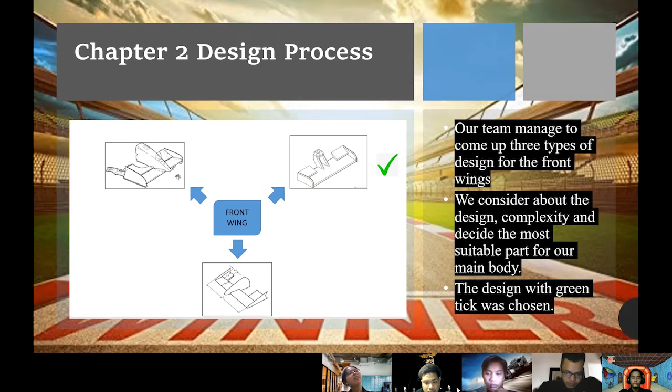We considered the design complexity and decided the most suitable part for our main body. The design with the green tick was chosen for the front wings.

For the rear wing part, our team also came up with three types of design. We considered the design aerodynamics for our main body to choose the best one, and the design with green ticks was also chosen for this project.

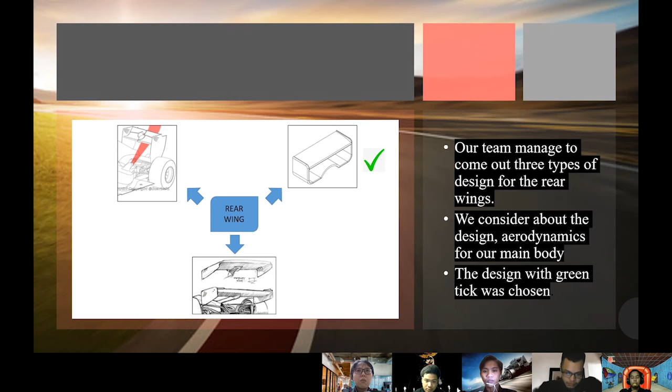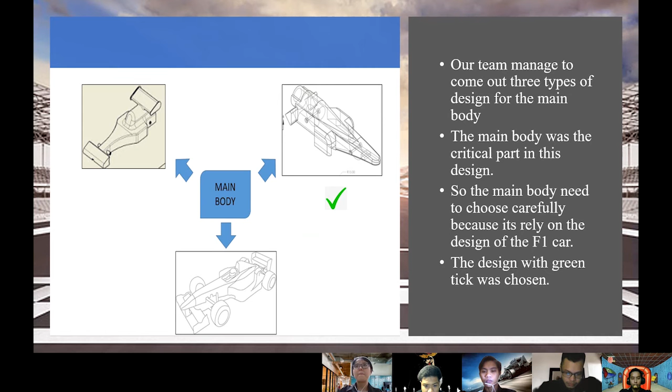For the main body, which is the critical part of the design, our team also managed to come up with three types of design. The main body was critical because it relies on the perfection of the F1 car's design and performance, so it needed to be chosen carefully. The design with green ticks was chosen also.

Next part is the wheels. We came up with three types of wheels, and the design of the wheels is important for the cosmetic effect. The design with green ticks was chosen.

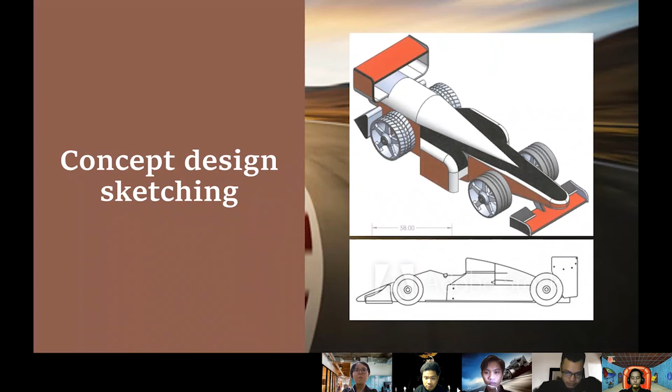This is the concept design sketching for our group. There are two types of concepts that we considered, but we chose the top one.

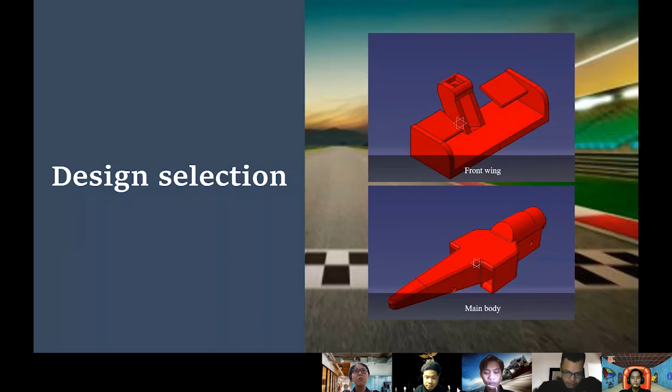This is our design selection after we completed the sketching and graphics. There are two types here, which are the front wing and main body.

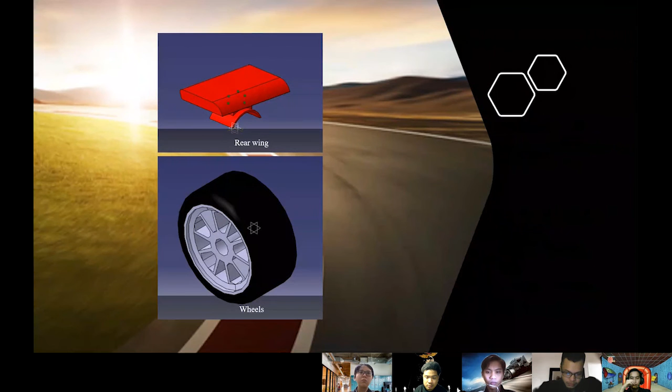Next is the rear wing and wheels also, which was done by the teammate. And this is also part of our F1 car: the shaft, the race power pack, and bearing.

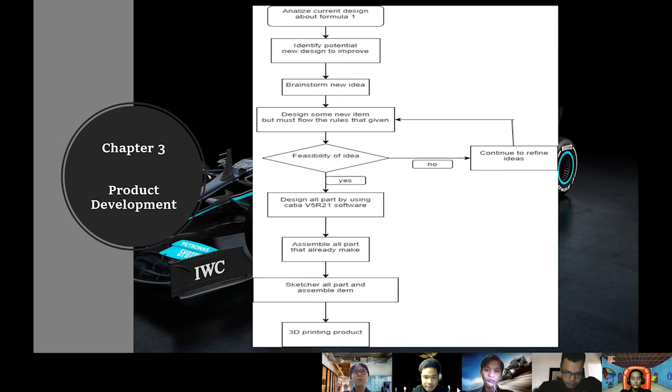The first thing is we analyze the current design of the F1. Next is to identify the potential new design to improve. Then brainstorm new ideas, designing new items that must follow the given rules. After that is the feasibility of the idea, but if the decision is no, we continue to refine the idea. If yes, we continue to design all the parts using Catia V5R21 software, and then assemble all parts that are already made. Then we sketch all parts and the assembled item, and lastly is the 3D printing of the product.

Okay next. So this is the assembling view. The weight of the F1 car is 156.29 grams. It's assembled by myself, Muhammad Akmal Hakimi bin Norazmi.

In this criteria, the length from the wing to the front wing is 201.32 millimeters. Then the height of this F1 is 63.15 millimeters.

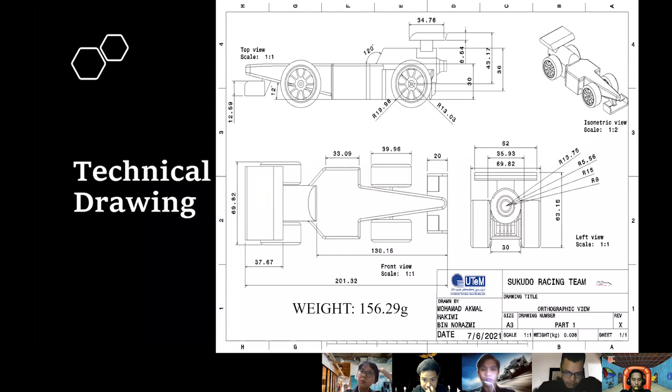So this is the drawing for the list of parts. Total list parts in this drawing assembly is 8 parts. The first is main body, the second is power pack, the third is drive shaft bearing, the fourth is the drive shaft, the fifth is tire, sixth is adapter rear wing, the seventh is back wing, and the eighth is...

Front wing one. Next.

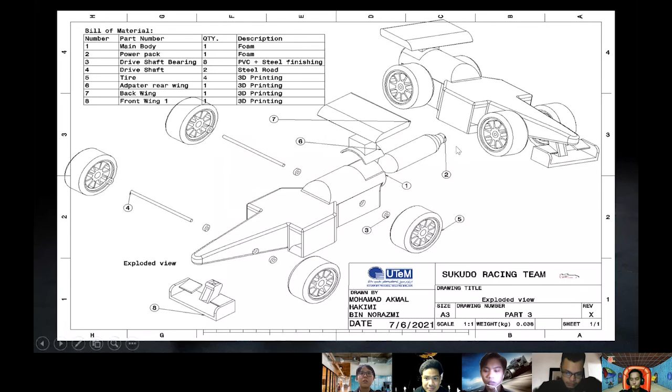So this is the cockpit side. The green mark is the cockpit side for the item. Okay, next.

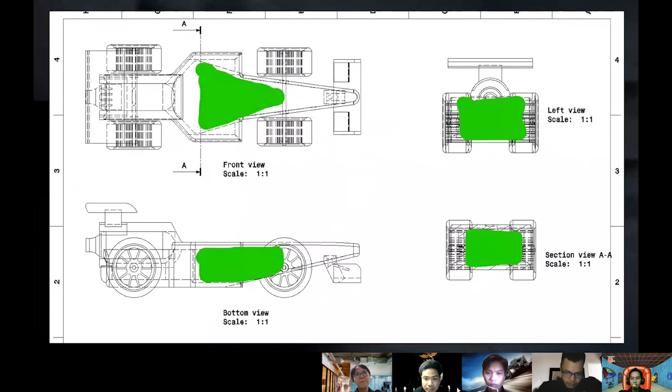So the first part is the main body. The main body, we learned from the aerodynamics. So there, if you see, it has the airflow, and it is designed by me, Muhammad Akmal Hakimi bin Norazmi.

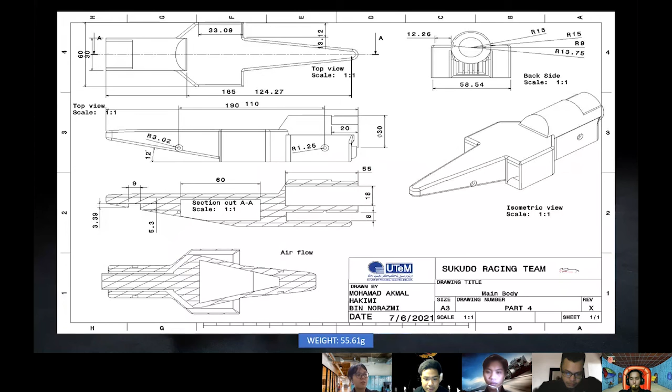So this is the power pack. The dimension in the power pack, we just copy from the rules of the F1 formula. So the weight for the power pack is 6.97 grams.

So this is the bearing, the bearing for the drive shaft. So the diameter is 6, so the weight is 0.065. For our car, we use 8 pieces for this part.

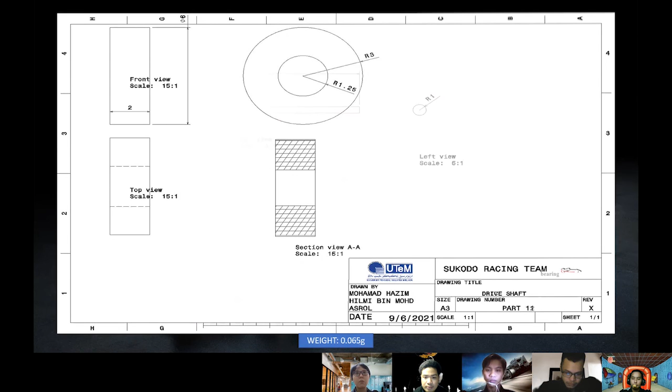Okay, this is the drive shaft. So the length for the drive shaft is 64. It's drawn by Muhammad Hazim Hilmi bin Mohd Asrol. So the weight is 1.58 grams.

So this is the design for the front and back tire. It's designed by Muhammad Afif bin Yusri, and the weight of the tire is 18.12. So the tire we use is 4 pieces for this project.

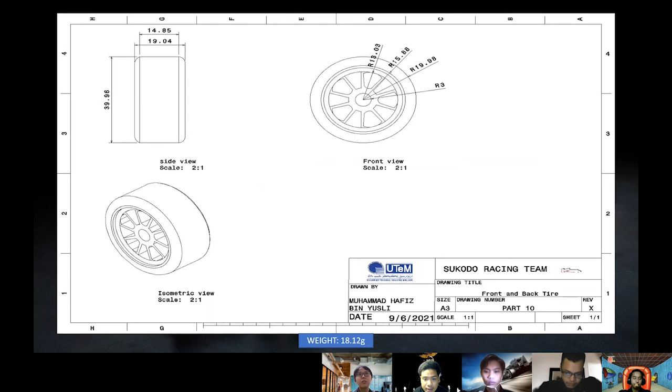So this is the front wing. We designed it to match the aerodynamics. It's designed by Shafiq bin Samsudin, and the weight is 5.7 grams. Next.

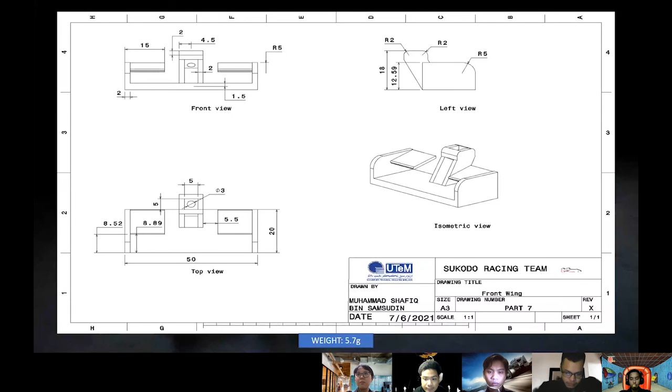So this is the background of our F1 car. So that is all for me. Thank you.

Assalamualaikum, my name is Muhammad Hazim Hilmi Muhammad Masrul. On this slide, I'm going to present about the component analysis. As you can see on this slide, these are two critical parts that we choose, which is the shaft drive and also the shaft bearing.

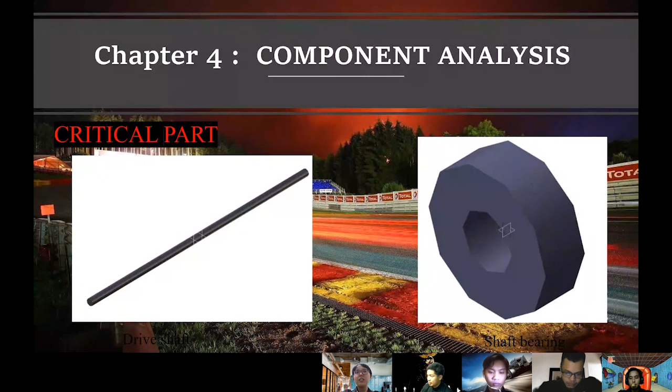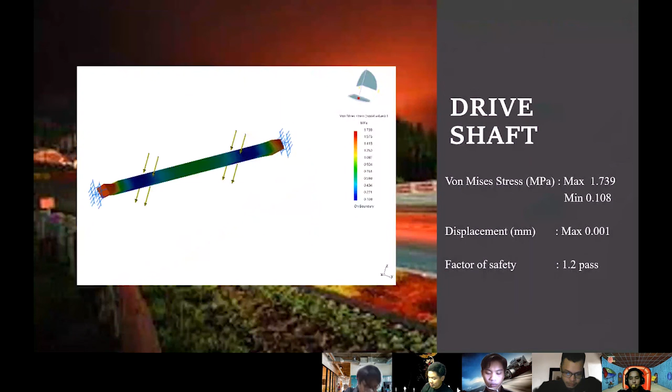On this slide, this is an analysis result of the shaft drive. The maximum value of von Mises stress is 1.739 megapascal and the minimum value is 0.108 megapascal. The displacement is 0.001 millimeter and the factor of safety is 1.2, which passes the requirement.

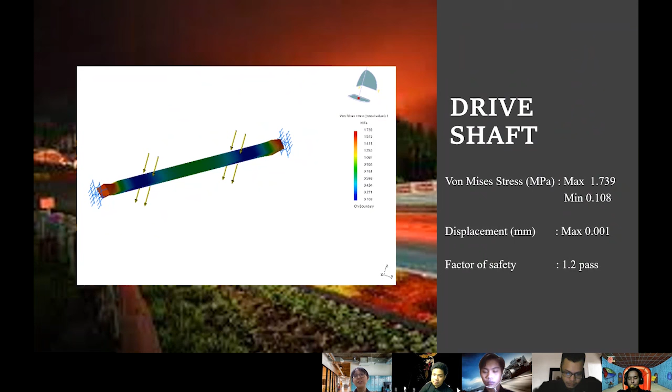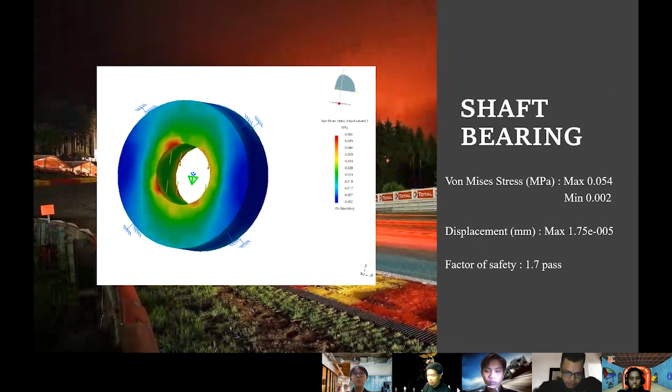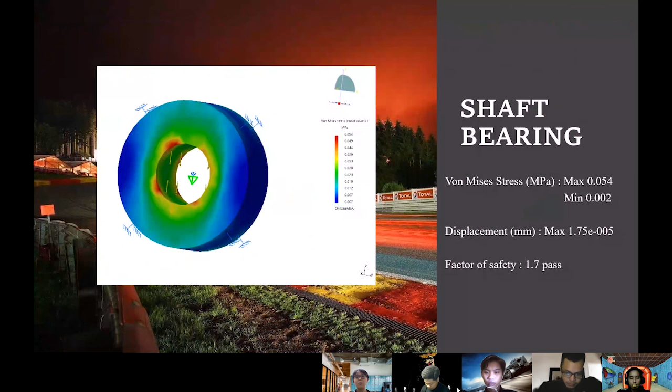On this slide, this is a shaft bearing analysis. The von Mises stress maximum is 0.054 megapascal and the minimum value is 0.002 megapascal. The displacement is 1.75 times 10^-5 millimeter and the factor of safety is 1.7, also passing the requirement.

Okay, now I will continue the bill of material and cost calculation. Firstly, I would like to introduce myself. My name is Muhammad Shafiq bin Samsudin and my matric number is

B0919110188. Okay, for this project, we use three types of material. The first is steel plate, with dimensions 1.5 millimeters times 3.0 millimeters. The second material is steel rod, with dimensions length 150 millimeters and diameter 8 millimeters. The last material we use to complete the project is nylon wheel.

Okay, for the cost calculation of all the materials, the first, steel plate, we use six pieces. One piece is RM 10 and the total of six pieces is RM 60.

And the second material is steel rod. Steel rod, two pieces, and one piece is RM 25 ringgit and 38 sen. The total of the steel rod is RM 50 ringgit and 76 sen.

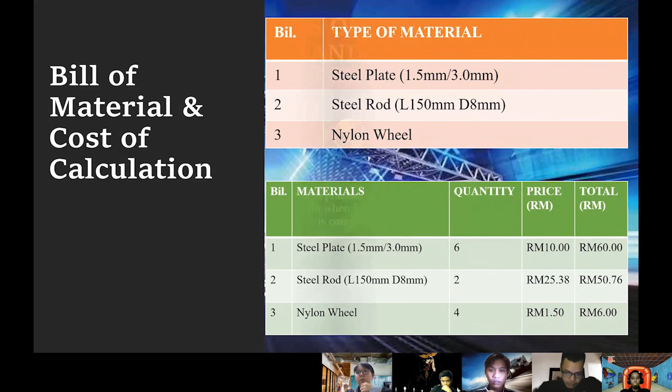Okay, next is the process in terms of safety, environmental, and sustainable factors. We have five main safety measures that are prioritized during this project process. The first is concern about current safety measures from the beginning to the end of the making of the Formula One model for our group.

Among the safety features that are important is that during assembly, the parts are joined together to become a fairly complete Formula One. From this point, as we know, the second point is regarding another safety aspect.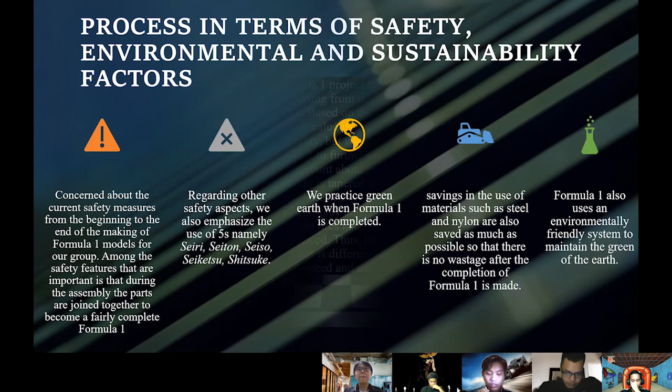Okay, for the conclusion, based on this overall project, we have achieved all of the objectives. The Formula One, we can successfully complete starting from discussion, design, cost calculation until the result of Formula One.

Based on the objective to create a new Formula One design that has its own separate part value. Through this design, we not only care about its beauty, but we also take into account the function of each part in this Formula One to further increase its speed.

Each of these parts has been taken into account for its cost and function to increase speed. The designed body is tapered in the front to allow it to be fast to split the wind, while in the back it is round in shape to attach the rear wing.

The front and rear wing also play an important role in increasing the speed of the Formula One. Lightweight tire and rim are designed to look beautiful as well as increase speed. Thus, the goal of our group was achieved: to design a Formula One that is different from the others and has its own part value to improve the speed and nicety of the design.